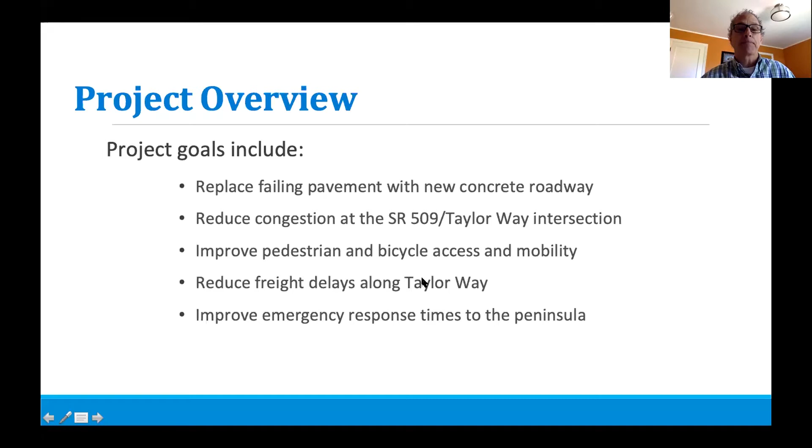The project runs from the Fife border, down in this area on the east - we'll call 509 north-south for this presentation - all the way up to East 11th Street and Taylor Way, and continuing to East 11th Street and Alexander in this area. The new concrete pavement runs from East 11th Street to 509, including the 509 intersection. Then we'll have new asphalt pavement from the 509 intersection to the border with Fife.

The project also includes a number of utilities. We're going to upgrade some utilities in the area because they're well over 75 years old - a large water main, sanitary work, and storm work. We're working with Pierce County to upgrade some of their facilities that run along this corridor too. We're upgrading some of the illumination, and you can see there are 4 new traffic signals we'll be installing, which we'll interconnect so they function better than they do now. We'll also be putting cameras at all these intersections so we can watch traffic and keep an eye on pedestrian movement through the corridor.

We're going to be installing a new sidewalk - a 10-foot wide combined path. It will run from 509 to Lincoln Avenue, because there's really no sidewalk there now. There is an existing sidewalk from Lincoln to East 11th Street that we'll be tying into, and we'll be repairing some of the sections that are not ADA compliant.

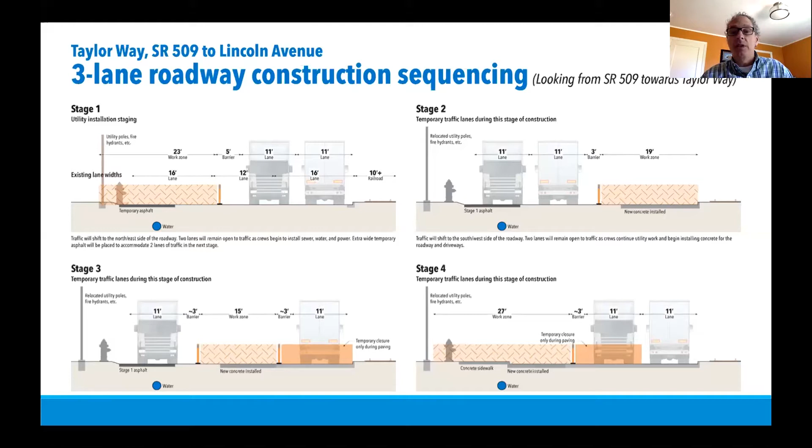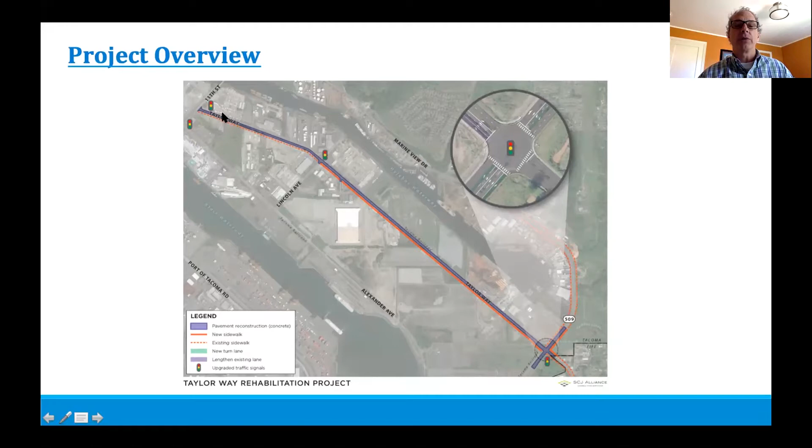Now we're talking about the section of Taylor Way, and I'll go back to the overall slide so you can see, but this is the section from Lincoln Avenue to East 11th. So if I go back here, I'm talking about this section of roadway now. That 3-lane build, how we're building the road in thirds, is going to occur between Lincoln Avenue and 509 -- that's the one we just spoke about. So now I'm going to talk about this section of road between Lincoln Avenue and East 11th Street.

This is a much narrower section of road. There's basically two 13-foot drive lanes without a center turn lane, so we're looking at doing it half at a time. At some point we will be closing that section of road, or portions of it, completely so we can finish the paving, finish all the utilities, finish getting the illumination in place, and repair the sidewalk where it needs to be repaired for ADA purposes.

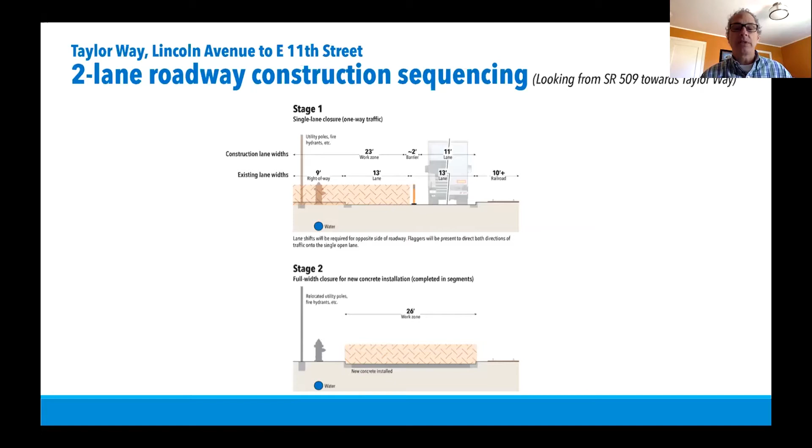This section of road has an actual detour route, which is great. So Taylor Way, from 509 to Lincoln, that's the portion we're doing in thirds. There's really no good detour route for that.

But this section has a great detour route. So as we work in here, this might be one way for a while, and then we would direct traffic via Lincoln Avenue, Alexander, and East 11th again. We could flop it, so it might be one way east, then one way west, and then we may close portions of it. I'll get to when those closures will occur. I know that's on a lot of people's minds, so we have a slide coming up for that.

I guess what I'm trying to say is there's much more flexibility in this portion of the roadway. During all this, we will be reaching out to the businesses, we will be reaching out to the community, we'll be working with the City of Fife, we'll be working with the port, we'll be working with emergency access. Even when sections of the roadway are closed, emergency access will still be maintained through the construction zone.

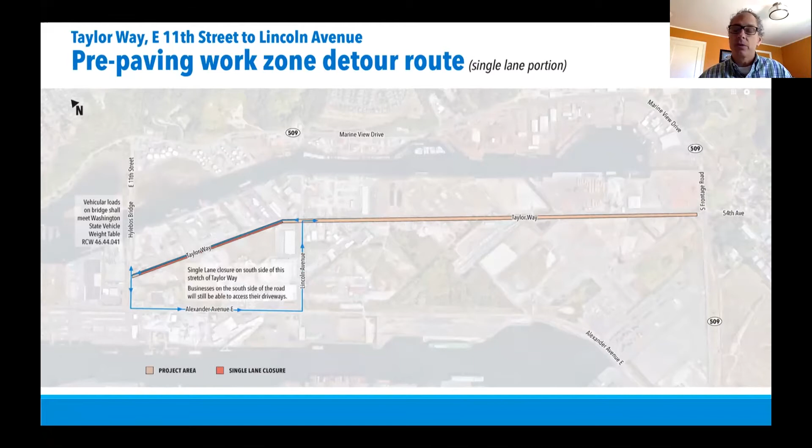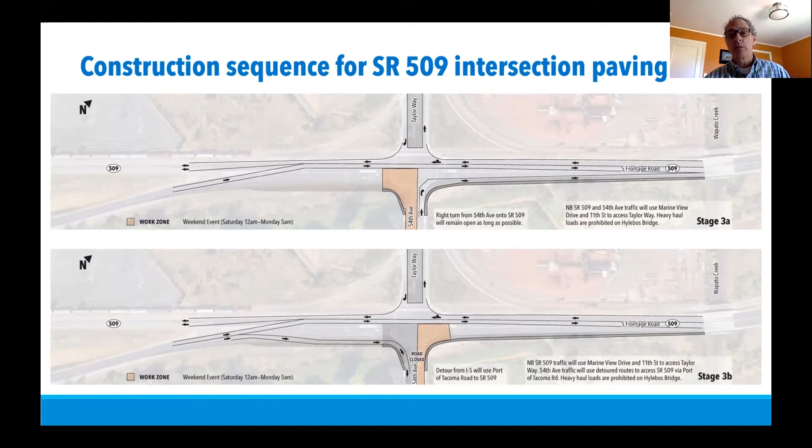For example, all these weekend events run from Saturday, 12 a.m. or midnight, basically, to Monday morning, 5 a.m. We worked with the contracting community, and everybody thinks this is possible. If it's not possible, we'll certainly let you know through updates to our website and the trucking community.

And then these are the final stages where we're widening a little bit on the north side of 509, in preparation to do stage 5A and 5B, which is the Taylor Way portions of the intersection. And again, this is all going to be in concrete, so the idea is for this roadway to hold up a long time after we're done and we don't have to get back here again.

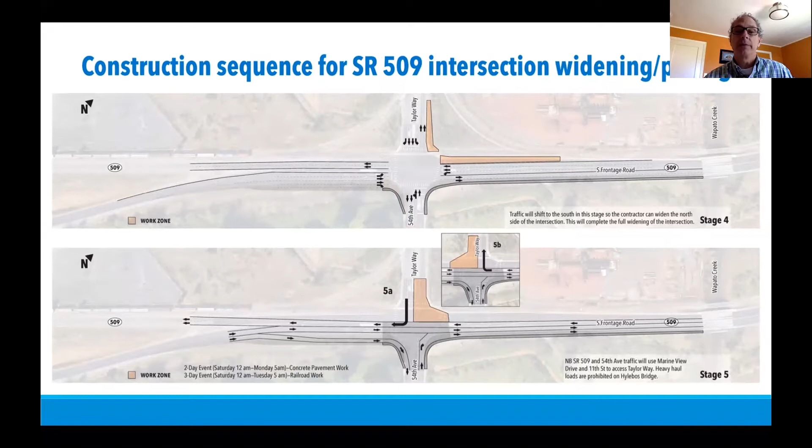And I'm going to try and minimize this if I can. I don't know if I can get it back or not, but we'll see.

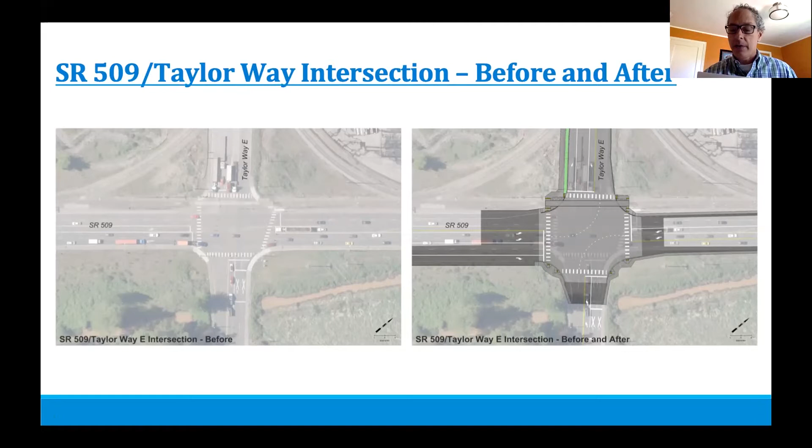And then here's a bigger view - okay, so again, this is the before and this is the after. And I'll do it again: before, and just keep an eye on this bottom part of the screen. You can really see the intersection pushing out, and the after. This again is to accommodate the additional left turn traffic we have.

So basically, we're going to lengthen these turn pockets too, because they're only about 300 feet now. We're going to make them as long as we can - some are actually going up to 700 feet, really, so we can get the trucks out of the through lanes, so there's enough room for them to back up. There's really never enough room, but we're going to do the best we can so people can use the through lanes a little bit better.

We are adding a dedicated right turn lane here as well to the city of Fife. And yeah, I guess that is the big takeaway from the intersection.

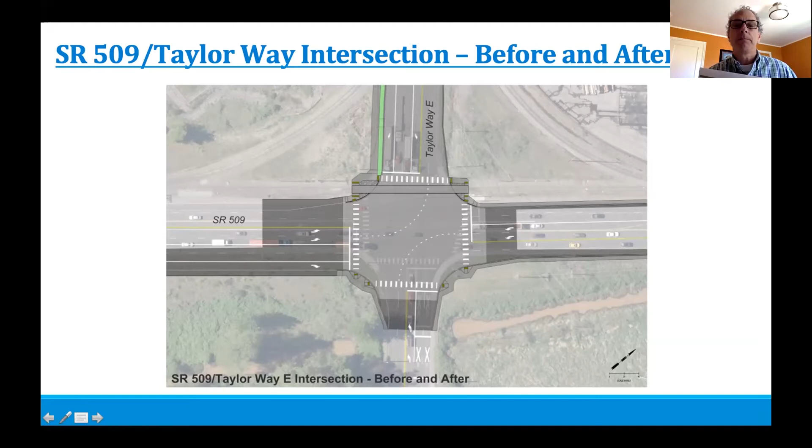Now, one other highlight of the project is we're replacing 9 rail crossings. These are big jobs, they take about 3 days to do each one, and the road has to be closed at each one of those locations. These rail crossings occur from Lincoln Avenue to 509, and they can occur with a road closure because we have this great detour here.

This section is going to be a little bit harder, but we'll have a detour plan that I'll show you in a minute. These road closures at all these locations will occur from Saturday 12 a.m. to Tuesday 5 a.m. We will put up message boards, we'll let everybody know, there'll be email blasts, we'll put it on our website, etc. But these are critical components to the project.

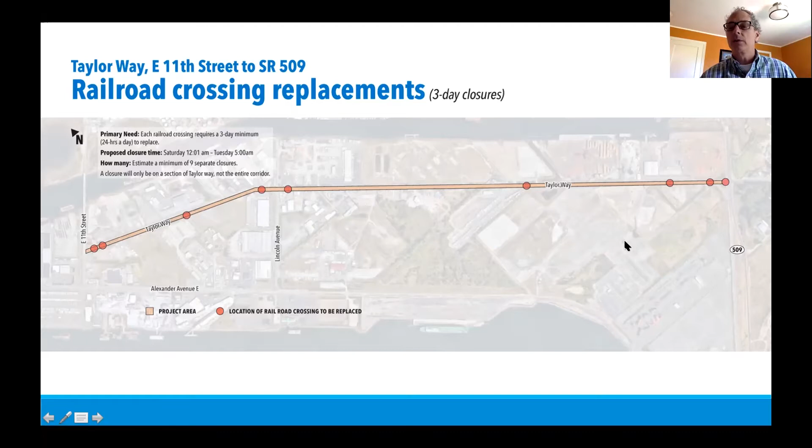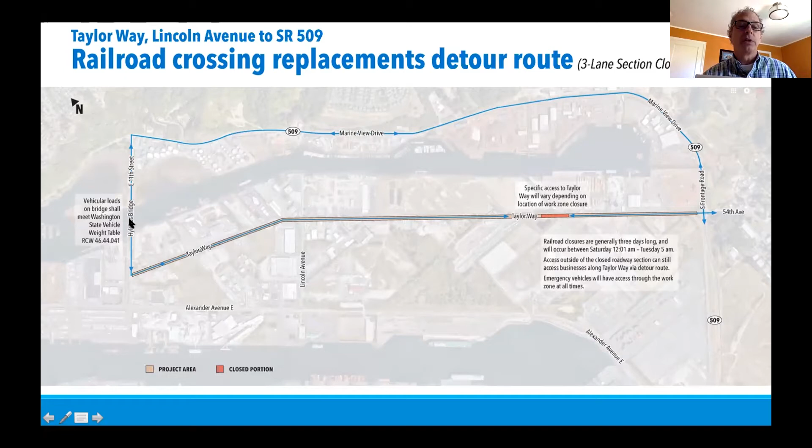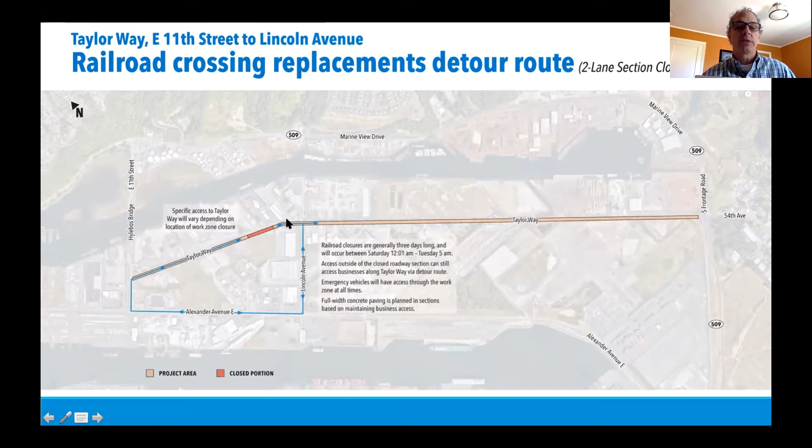This would be the detour route. If we had to close a section of Taylor Way in this area, it'd be via Marine View Drive, East 11th Bridge, and back to Taylor Way here. Again, this is the detour when we're working on a rail replacement in this section - Lincoln Avenue, Alexander to the 11th Street Bridge.

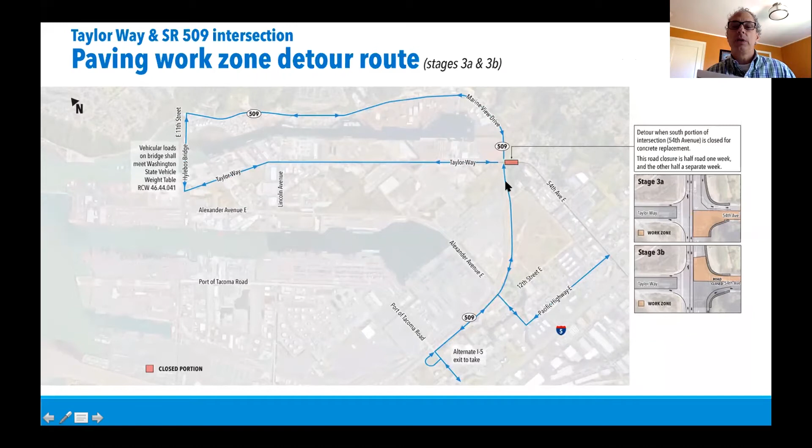When we have to actually close 54th Avenue East, that will be for a week. The detour route would be via Alexander, Port of Tacoma Road, Pacific Highway, etc., to get traffic to this intersection, and we'll be doing everything we can to make that happen.

I get a lot of questions on when the road is going to be closed, when 509 is going to be closed, and when they're going to take lanes. As I said earlier, there's always going to be 2 lanes of traffic on 509 in each direction, which is basically what's there now, plus the turn lanes. So since we're talking about 509, that would be this section down here.

This is an example of what we have in our specification now. It could change during the life of the project, and we would let you know. But for example, for a contractor to take a lane or close one of those 2 lanes, they could only close it between Monday 8 p.m. and they'd have to have it open Tuesday at 6 a.m. So that's kind of how this works.

These times vary based on the businesses and the haul routes in the area. For that section of Taylor Way that does not have the detour from Lincoln to 509, these would be the times and days they would be able to close one of those 2 lanes used for vehicle traffic, and a detour route would be set up. For example, it would be Monday at 6 p.m. to Tuesday 6 a.m., when it would have to be open.

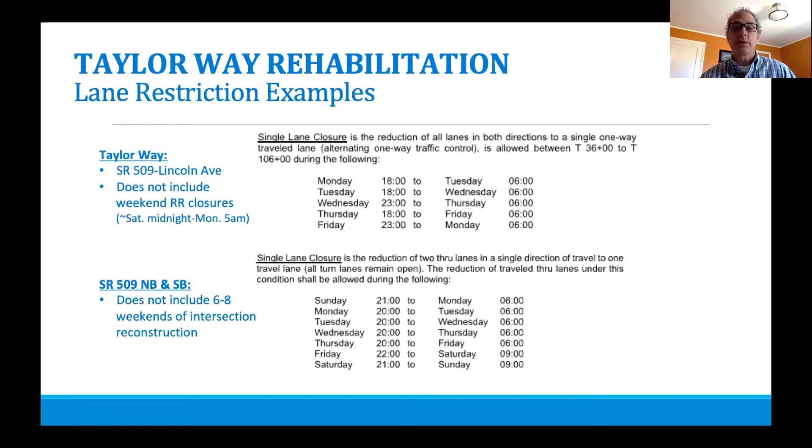Again, the times here vary based on trucking schedules and the major freight users in that area. This is an example, and it could change throughout the life of the project, or if the contractor comes up with a better plan that can finish the job quicker, we're always open to those types of suggestions.

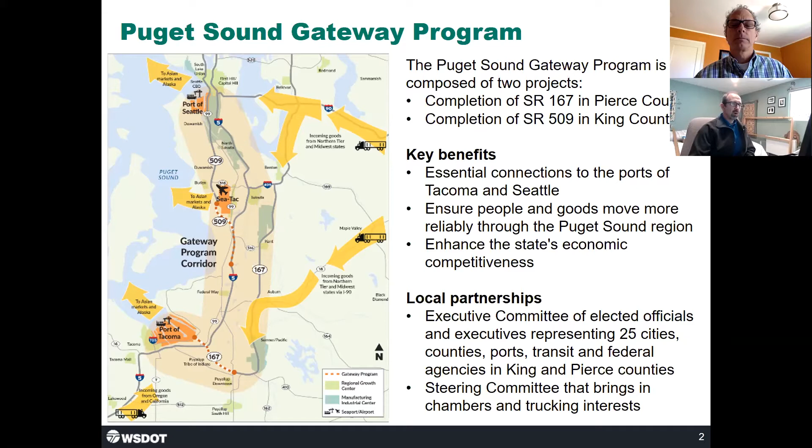So with that, let's dive into the 167 completion project itself. This is probably the best graphic to understand the context of the 167 project. We are going to be building about 6 miles of new highway from Puyallup over near State Route 161, through the valley, up and over to Interstate 5, and then continue with a connection down into the same vicinity that Mark has been describing on 509. We're a little bit further west in the Alexander area, but we're definitely in the same vicinity as Taylor Way.

Some key components of the project - we've broken it into 3 construction stages. On the graphic, you'll notice orange color with stage 1A, which builds the new 70th overcrossing over I-5. The blue color is our stage 1B, which will build from I-5 over to State Route 509. The purple or magenta color builds essentially from I-5 out to Puyallup, and we call that our stage 2 section.

You'll also notice other coloring on the graphic. The green shading is what we call our riparian restoration program, shown as RRP - that's the environmental component of our project, which will do a lot of improvements along Hylebos Creek and Surprise Lake tributary that comes down out of the Milton Edgewood area into the valley floor. You'll also notice the dashed gray line, which is the approximate location of the planned route for Sound Transit's Tacoma Dome Link Extension project, and we are coordinating with them as well.

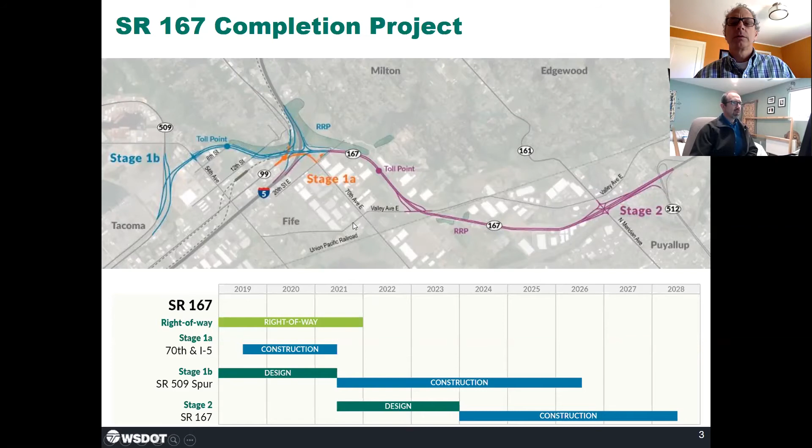Moving on to the next slide - this is a closer up view of the area we're talking about today, which is between I-5 and 509, and you can actually see the Taylor Way intersection here. One thing this project will do is give us an access point onto the highway at 54th Avenue. So if you come through the Taylor Way intersection headed south on 54th towards I-5 and wanted to get on 167 at that point, you would be able to get on it and head towards I-5, and either get on I-5 or continue going east towards Puyallup.

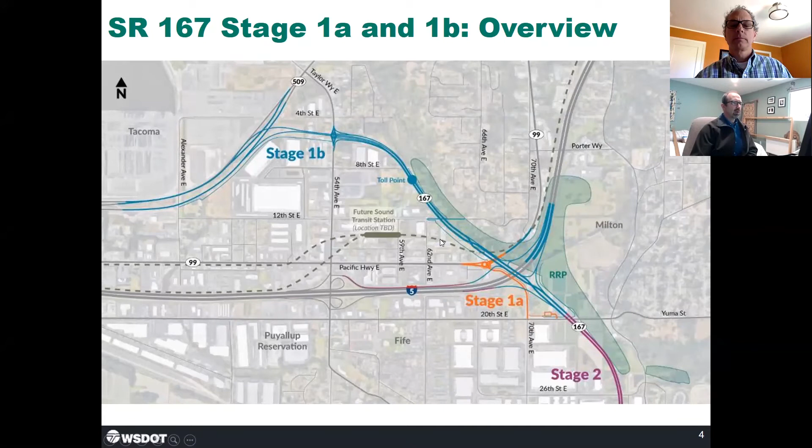Now granted, that won't be constructed till stage 2. Another thing you might notice on this graphic is some small lines paralleling the corridor - I wanted to articulate that we will be building some shared use path as part of our project. There'll be a connection with the interurban trail on the south side of I-5 that will take you up and over I-5 to Highway 99, and then the shared use path for pedestrians will basically parallel the highway all the way down to Alexander.

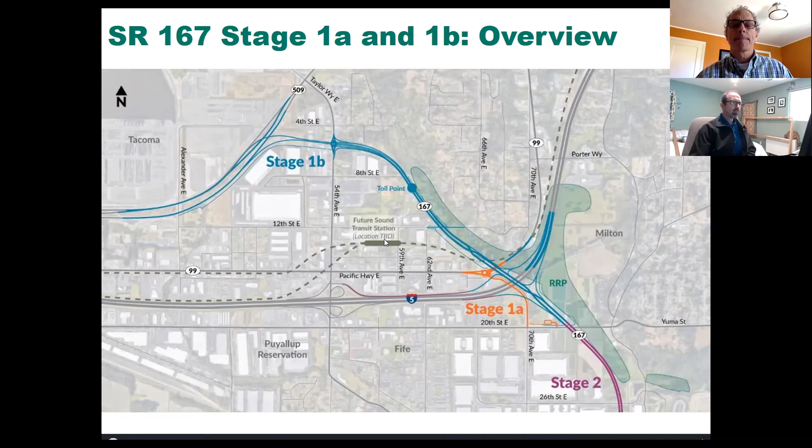Looking at stage 1A, if you've driven I-5 recently, you may have noticed just this last week that pile driving has begun on the north side of I-5 for the bridge that will cross over I-5 for the new 70th Avenue. This graphic shows the existing location of 70th Avenue, which is just a 2-lane bridge, and it shows the new roadway of 70th Avenue that'll go from 20th Street over to SR 99, which will be a 4-lane roadway section with a shared use path on the east side of the roadway.

This also shows a new intersection with Highway 99 - that will be a new roundabout constructed a little bit to the south of the existing location on 99. Another thing to highlight on this graphic is the new interurban trail parking lot off of 20th Street, which will be replacing the existing trailhead parking that is currently located off of 20th Street.

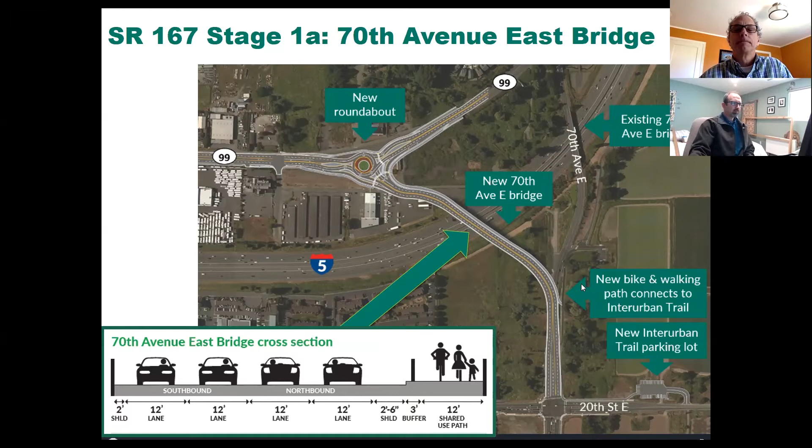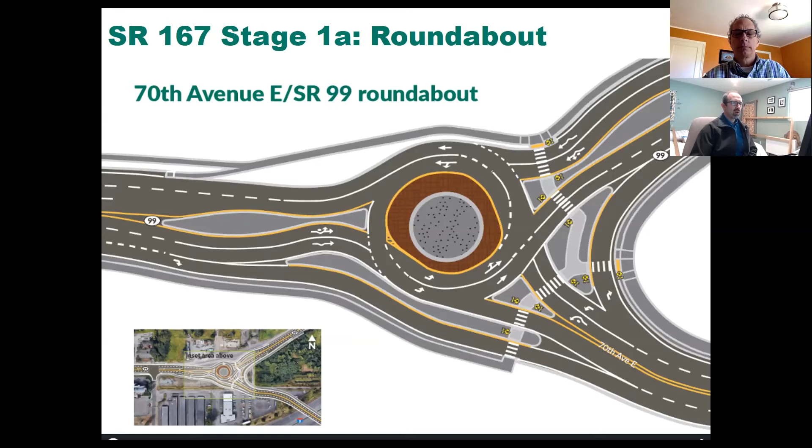This is just a closer zoom in of the roundabout, which shows how pedestrians will be accommodated through it, and all of the various geometry for that roundabout. A lot of design work has gone into the roundabout to ensure that it will function well and safely for truck traffic as well as pedestrians, and we're really looking forward to the improvement it will bring to this area by being able to move vehicles through this intersection a lot more efficiently than the existing intersection.

This is kind of zooming back out to show our planned interchange of where the new highway will come in over the top of I-5. I was just showing you where the new 70th Avenue location will be, and this shows what we call a DDI, which stands for Diverging Diamond Interchange, as we currently have it designed.

Some of you may have heard about a Diverging Diamond Interchange being constructed down in Lacey in the Hawks Prairie area near Cabela's. That will be the first Diverging Diamond Interchange in Washington State, and our interchange here is expected to be the second in the state. It's definitely a little different than what we're used to, but these have been constructed all over the United States—somewhere in the neighborhood of about 80 of these—and they're very efficient and very safe.

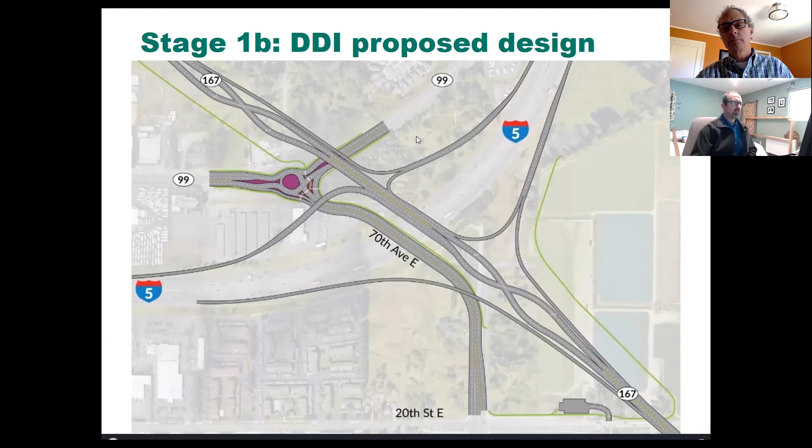Eventually there will be work that impacts traffic a little bit, but mostly during the night hours, where we will tie in the new roadway to the existing roadway. Typical work hours are Monday through Friday, 7 a.m. to 3:30 p.m., with some occasional night and weekend work.

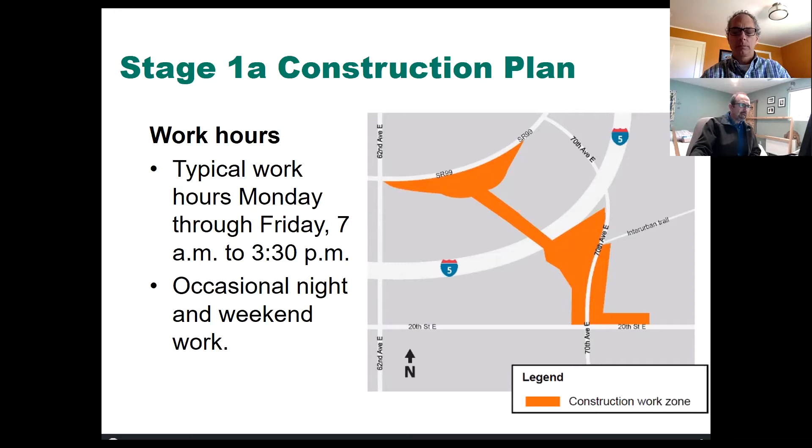So what to expect? We will have some occasional flaggers on 70th Avenue and 20th to help get trucks in and out of the area, to get materials in and out—concrete trucks, etc. We will have to have a few periodic lane closures on Highway 99 between 62nd and 70th Avenue. We've already implemented a speed limit reduction there, which will help with safety for the workers as well as those traveling who may be distracted by the activity occurring around Highway 99.

And we will ultimately have to do a full closure of I-5 late this summer when we go to set the new bridge girders over I-5, but that'll typically be done between midnight and 4 a.m. So most of us won't be affected by that, but when we come through the next day, we may notice that something looks different over I-5.

So that really is my last slide. I guess I would just say that we've been coordinating closely with the City of Tacoma on this project, and just as well with the Taylorway project, and our schedules I think will align pretty well. Anyhow, I think we're well coordinated.